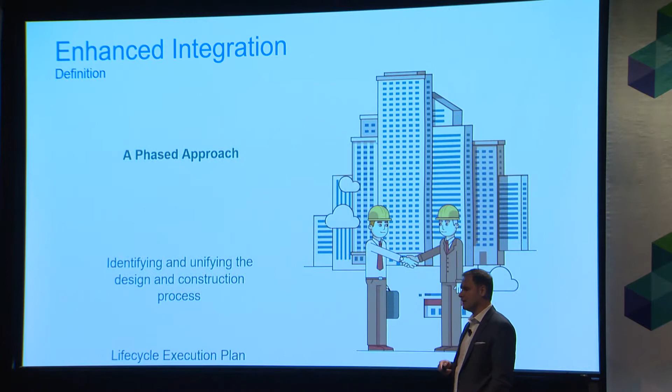So what is ILM, right? Effectively, it's a phased approach that allows us to use a lifecycle execution plan. Our first execution plan on the Mercy Hospital Jefferson project was about 65 pages. We've now whittled that down to about 15, so it's a lot easier to digest, and there's still a great amount of data, or information, in it.

So some of the tactical problems we identified very quickly from their previous projects—we were talking with some of the previous project teams to see how those projects had gone. The biggest thing was there was a massive rift and disconnect between the design and construction teams, which certainly provided some cost issues and many RFI issues as well.

There was really a lack of transparency from the point of Mercy's project managers. They really had no idea what was going on during the design and construction process. They would certainly have owner and operator meetings during the project process, but they were really only told what they wanted to hear, that everything was going fine. And then the biggest point I think here as well was that the 3D models being generated were completely being recreated at each step, which was mentioned earlier today.

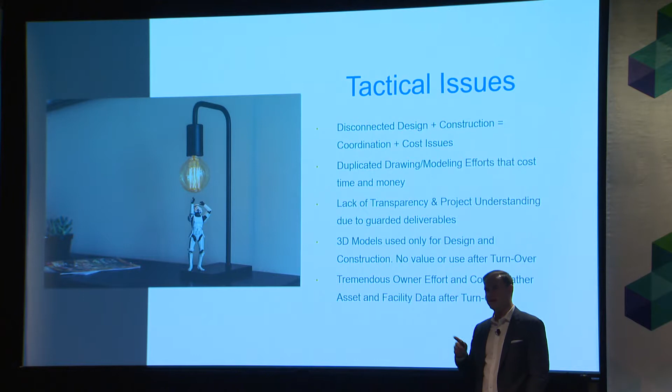So this is a quote that I like here: to have a core principle, everything else is just tactics, right? So how did we improve these things? Well, of course, we created the execution plan, but there was a lot of education that we had to do as well. So we went through and we met with each project team individually, then we started to bring everybody into a big room similar to this.

And we started to talk about, okay, what are our goals? How are we going to get there? And it was a very collaborative process, and we actually brought in the subcontractors at about 50% design development, which is very atypical, especially for a hospital project of this size and scope. And then, of course, we focused on the end, right? We're now starting to begin by thinking about the end first. Where are we going?

So to talk a little bit about how we broke down these silos and how we engaged many of these different stakeholders, Steve will tell us about how we were able to break some of those barriers. Let's use healthcare technology management, clinical engineering, biomed. They all go by different terms. We really noticed that the whole group was affected by this, all the way from admins to management to technicians to operations coordinators. They were used to the same things, but explaining and educating these folks on these new processes was a little bit daunting to them.

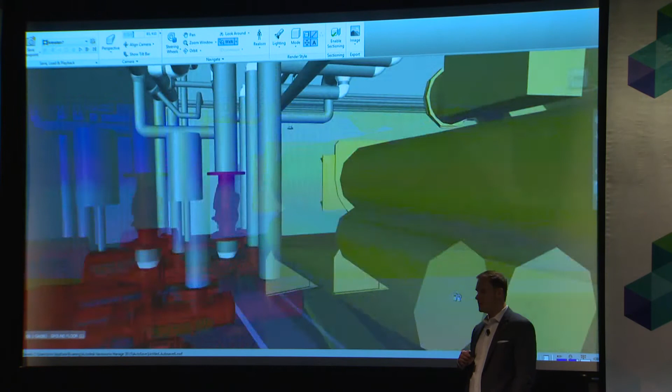So some of the ROI gains that we saw by going through these processes were, of course, being able to reduce cost, integrate multiple different systems, as well as increase performance. So this is a quick video of a few different technologies that we used on the Mercy Hospital Jefferson. So of course we scanned the existing central utility plant here. Then we jump into Navis.

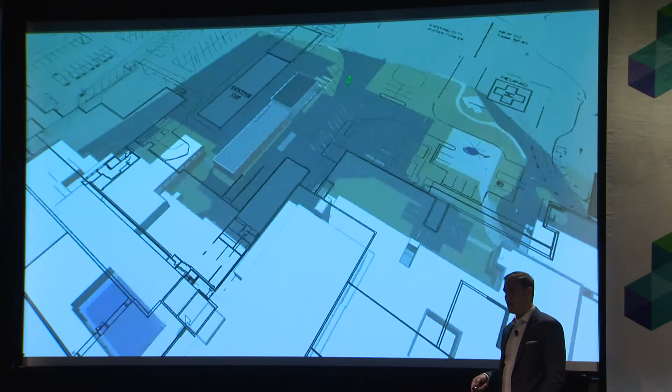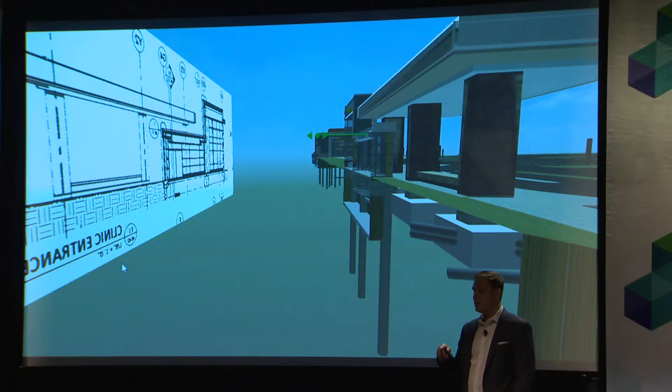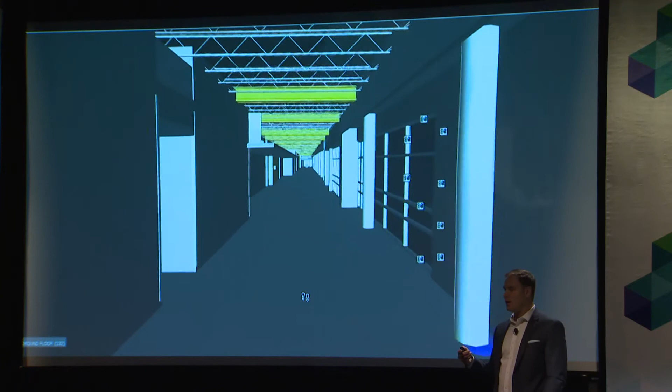And this is Revizto, where we're overlaying a floor plan on top of the model, and we're able to section that up and down. And one of the great things about Revizto, other than it can go right to VR as well, is that any one of these sections that are cut inside of Revit align directly to the model and allow anybody to section it down and see exactly the detail level that's in the model, right? Because we were really targeting a level 400 at the end of design. Now in certain areas we hit it and some we didn't.

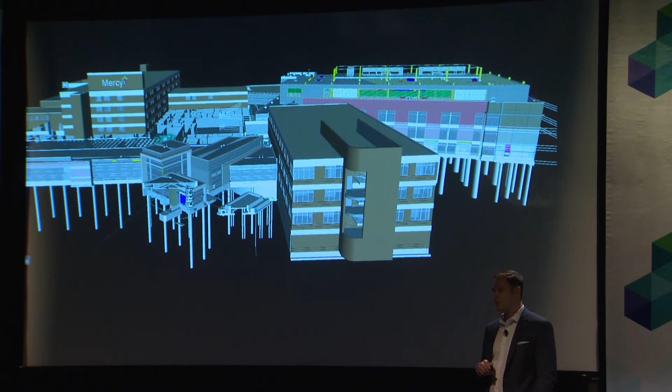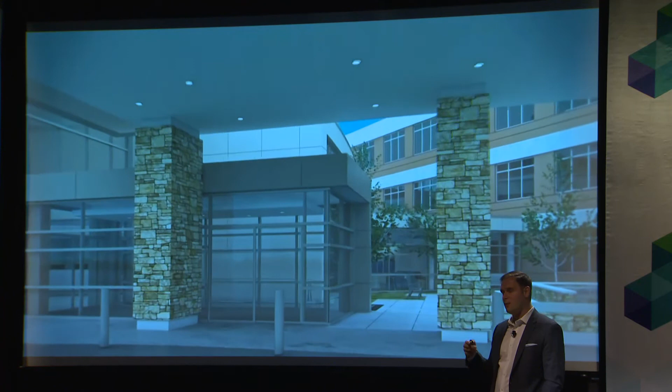We did a couple of nice little walkthroughs, and this is an example of some drone fly-throughs and some site scanning here. And so in this project, we redid the main entryway as well as added a 4-story bed tower off to the right there. Again, we're back into Revizto. Now, I really wish that I had some actual pictures here of the entryway as we're going through this walkthrough, because this is exactly what the entryway of the hospital looks like. Our rendering team really did a bang-up job of this. And then, of course, we jump back into some drone flying around here.

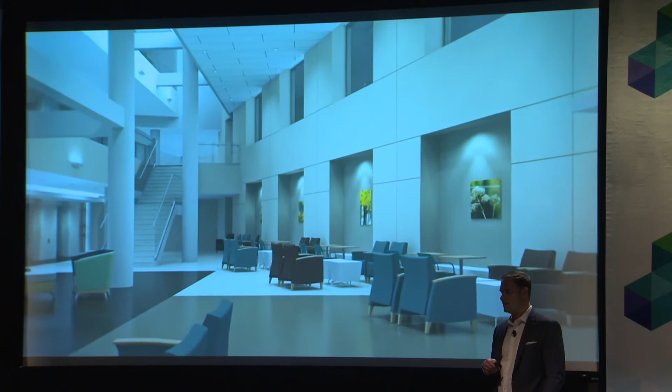So we really had a lot of challenges in this project specifically because of the existing conditions and then connecting that to a brand new bed tower as well. So we did a lot of scanning, a lot of visualization on this project.

Okay. So a little bit more specifically about this project. It was about a $600 million project. It was an 8-story bed tower. It was also renovations of the main entryway, oncology, cardiology, as well as the labor and delivery centers. And we did a little bit in the central utility plant as well as where we started.

I will also state that developing the relationships and taking applications away from folks, thinking that they're happy with what they have, has always been a struggle, and having a key sponsor and a key leader to enforce that is really critical to the project. So anytime you can sit down and have a strong relationship with your leader as being a product owner on this project, you can help break down that division.

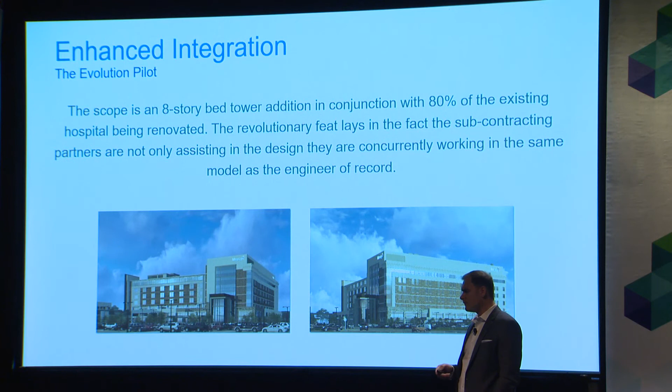In terms of looking at the ROI from the operational perspective, again, we wanted to hit a 10% savings, right? So basically, the Jefferson project was about 700,000 square feet of renovated and new space, and we were able to target a 6.75% ROI on the operational savings. So that was about a half a year payback period that we saw just on the Jefferson project. So we've tuned these numbers a bit, and we've gotten a bit closer on the Rogers project to that 10% across both of those options.